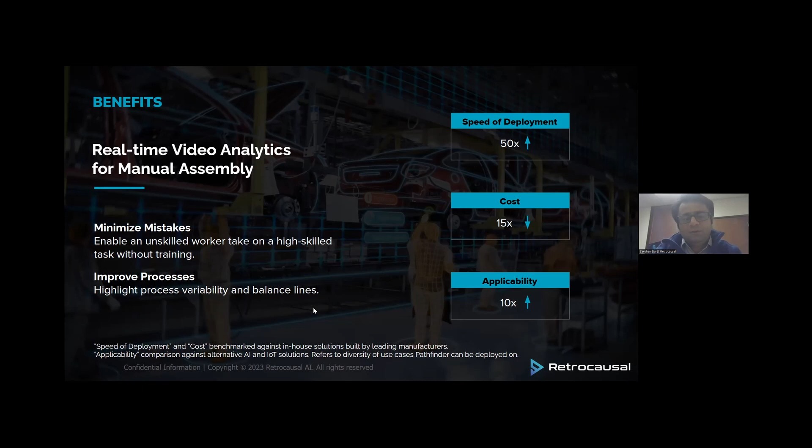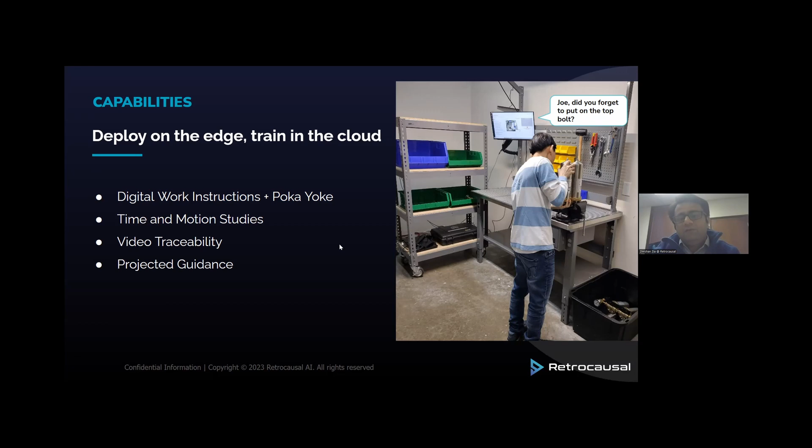These are some of the capabilities that we provide, and I'll walk you through a couple of those real quick. Our solution is centered on digital work instructions and digital poka-yoke, which help your workers get instruction when they need it, as they need it, right there and then. We provide time and motion studies, record video data for video traceability, and have the capability of projected guidance.

One of our core principles is worker privacy. So while yes, we are recording video data of manual assembly processes, we have several capabilities centered around maintaining worker privacy. We don't want to be big brother, and we don't want to be complaining about your workers to you. I'm happy to dive deep into a number of things in that domain as well. But let's just dive into a demo video again.

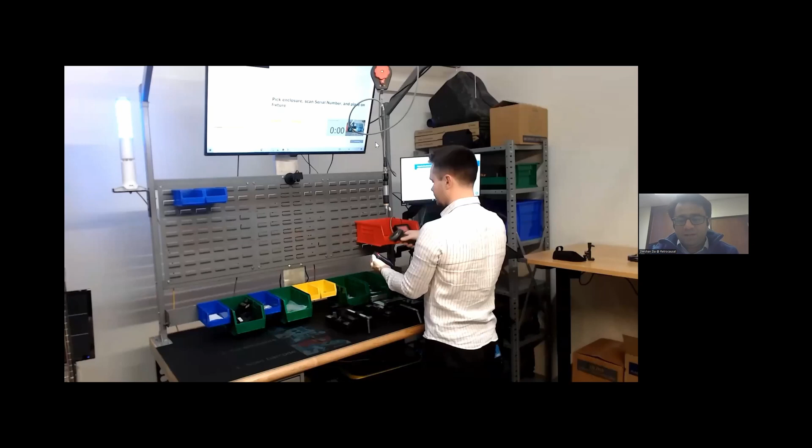Would love to host some of you at our lab and have you try this assembly process yourself. This is a mock-up of a real assembly process where we are deployed. This is for an electronics gadget assembly and packaging. This is the operator's view.

In this case, we put a camera on the operator's head just to capture this marketing video. You don't need a camera on the operator's head, but there's a display mounted in front of the operator, a projector projecting guidance right on the workstation, and a light tower deployed as well. The operator performs a step, and the system offers alerts right there on the workstation as to the next step they're supposed to perform.

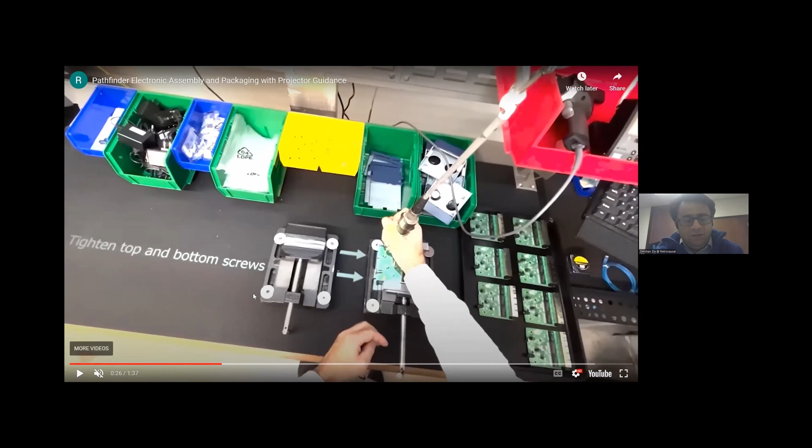This is a display that's mounted in front of the operator. You see here the operator is also getting instructions right on the workstation: tighten top and bottom screws. He's seeing arrows pointing to where he's supposed to tighten these screws. He doesn't have to press a button or anything - the system just automatically detects.

Right now, I'm sure you can't hear it through the call, but on the display, the system shows that an error has been detected, which is that the operator was supposed to tighten the bottom screw, but instead his hand went in and he started picking up the lid to tighten the lid on the enclosure. So the system is offering him an alert here, and there's also this light tower that's going red.

And that's making a noise on this loud factory floor. The operator realizes that he had skipped this step, goes in and fixes it, and the error message automatically goes away. The system detects that the error has been fixed, and the message goes away.

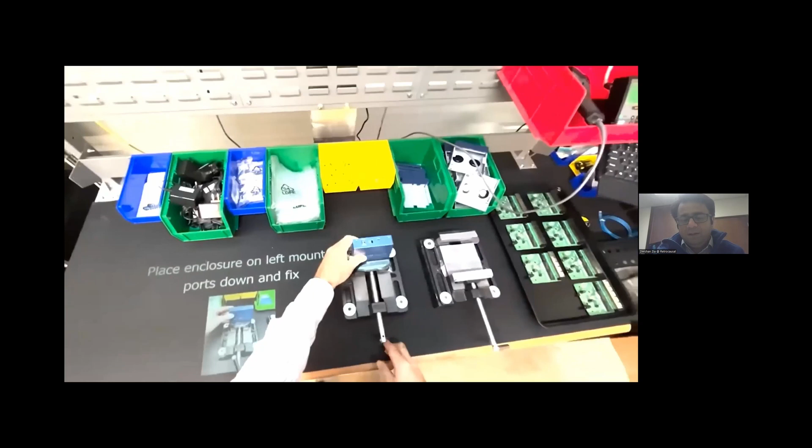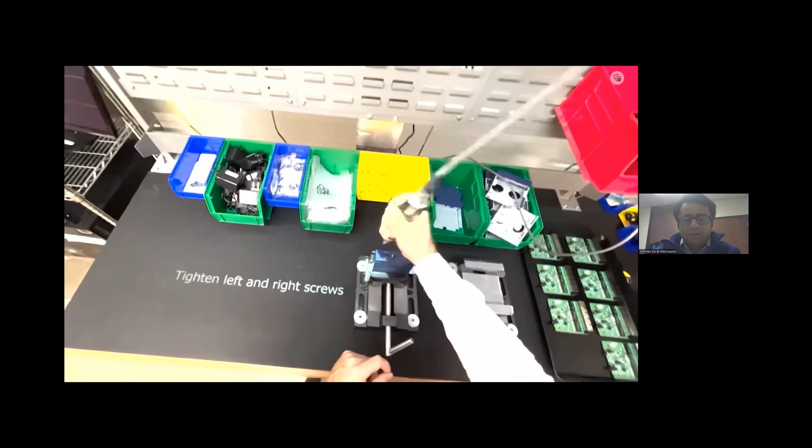Again, the operator keeps performing these steps, and the system is detecting and tracking the step the operator is at, automatically offering the next step and then the next step to the operator. We also have animations and CAD models that you can render directly on the workstation that tell you exactly how to do the process - you don't see it here though.

We've had VP level folks from big companies come into our lab, and we didn't tell them anything. They would just go to this workstation and do this process without talking to anybody, and they would be able to do it completely autonomously and successfully.

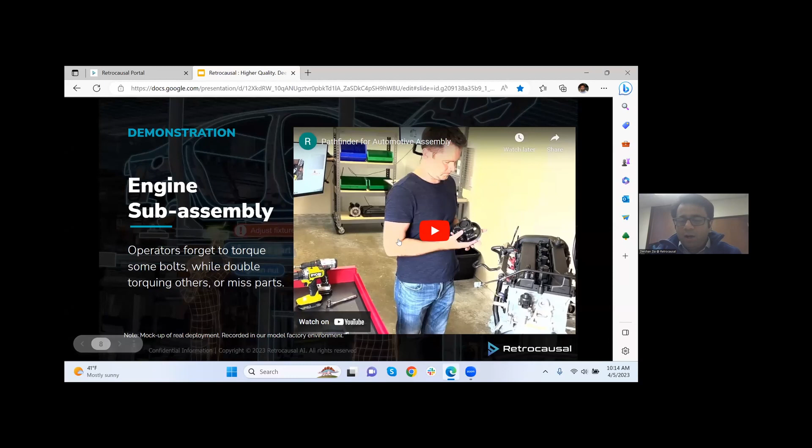So that's one part of it, right? Where there's a display that's mounted in front of the operator. In this case, it's a little bit too big because this was aimed more at exhibitions and so on. But there's a display, a light tower integration, and that projector based guidance that the operator is seeing. This kind of an experience is really simple to build - you can deploy it in a matter of a day or sometimes a couple of days.

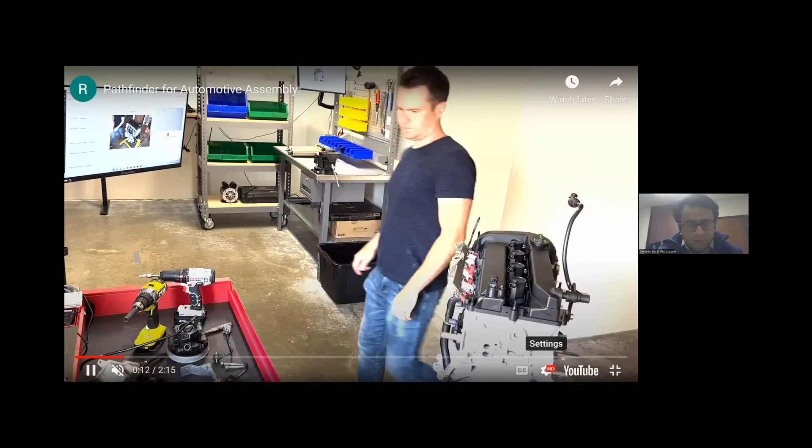Here's another example where we don't have projector guidance - so the projector is really just optional.

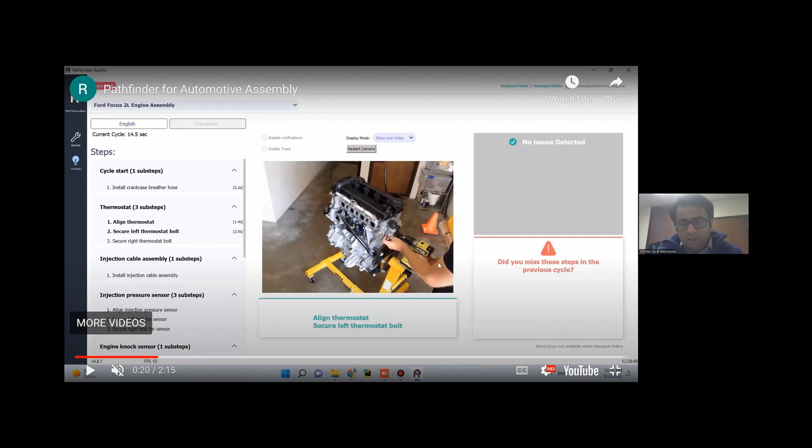There's this display that the operator is seeing, with the system on the left-hand side. You see the standard operating procedure, each of the steps in the process, with the current step shown in bold. We're also measuring the amount of time spent on each step, and when the operator makes a mistake, those mistakes appear here.

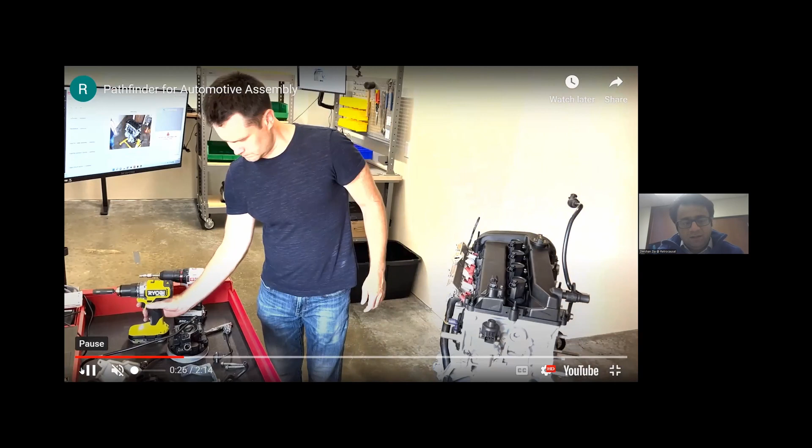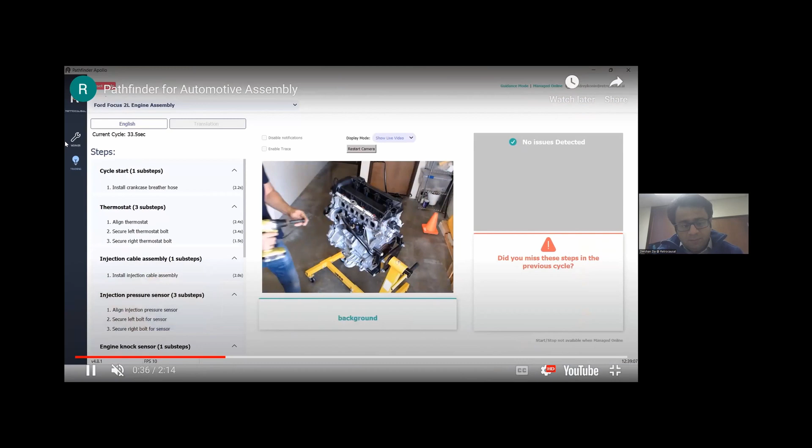We'll see that he makes a mistake or misses a couple of steps, and the system shows him that. He skips a couple of steps and goes forward, and the system shows him he's missing these steps. It offers an audible alert, and then he goes in and fixes those mistakes in real time, and the system signs off on those fixes, saying, yep, you got this, this is great.

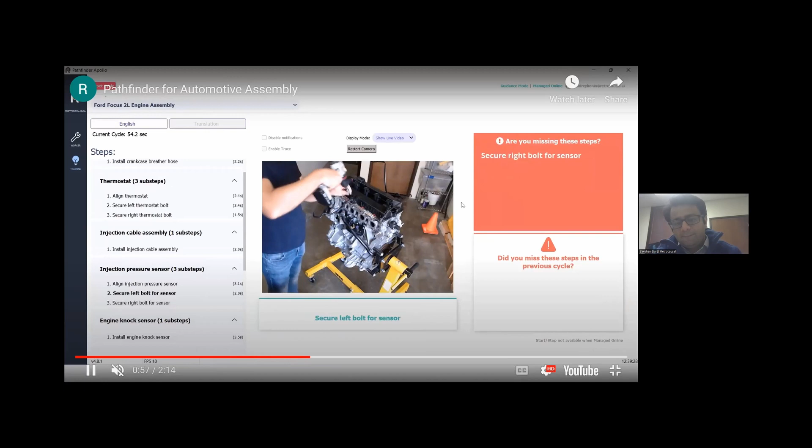Any questions so far, folks? I'd love to show you a bunch of real use cases of this sort of thing.

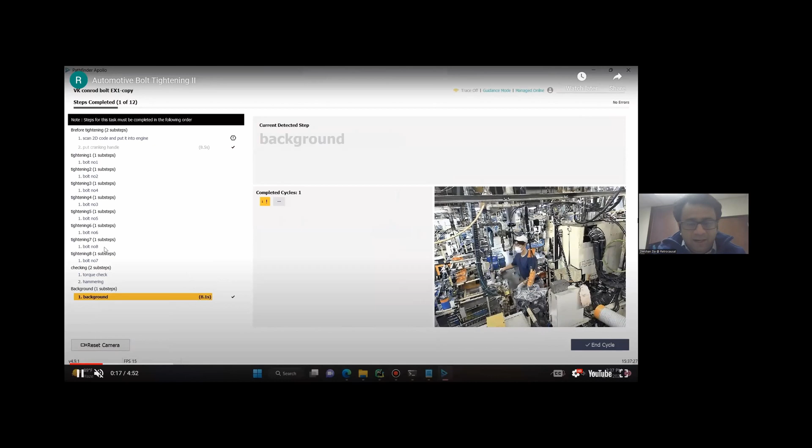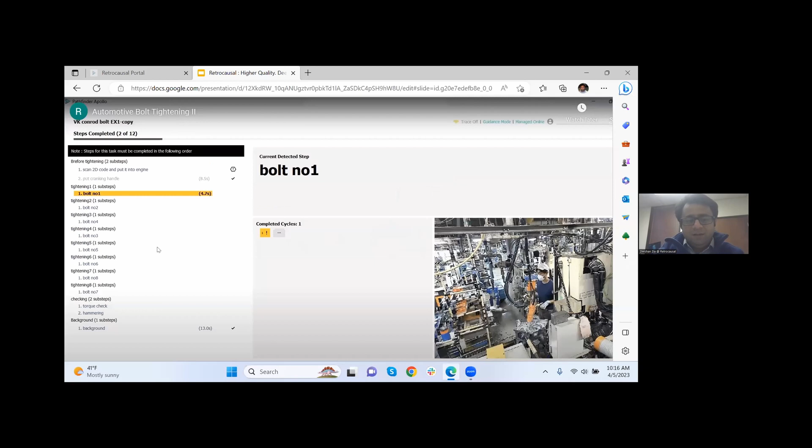In automotive, we're seeing a lot of use cases where operators forget to tighten or double-torque a bolt while forgetting to torque others as they're assembling an engine. This operator is supposed to tighten 8 different bolts with this torque gun, and oftentimes they'll double torque a bolt while forgetting to torque others. This is a real deployment with a large auto manufacturer.

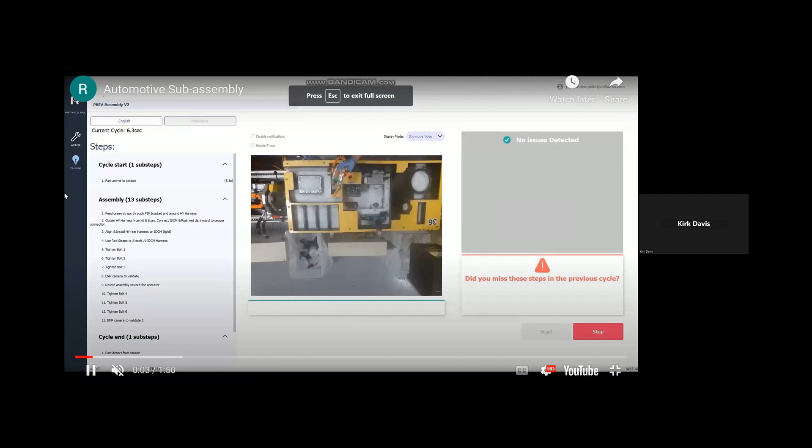Dr. Zia, I have a quick question. This is Kirk. I'm very fascinated with the different work environments you've shown, and I'm sure everybody watching is thinking of their own work environment. The first one was kind of a tabletop system, but now we're watching people do this in more of an open environment. Is there a limitation to the type of environment this technology can work in?

No, obviously you want to be able to see the activities you want to capture with a camera. There are environments where we haven't been that successful, for instance when the operator is doing assembly inside of the vehicle body—it's just hard to find a placement for the camera that will work. But as long as the camera can see it, if a human looking through the camera could understand what's going on, chances are our system can as well.

This is an example of a really small electronic device, a medical device being assembled. In this case, the camera is placed really close to it, even though the parts are really tiny. Because the camera is close enough, it's still able to capture it.

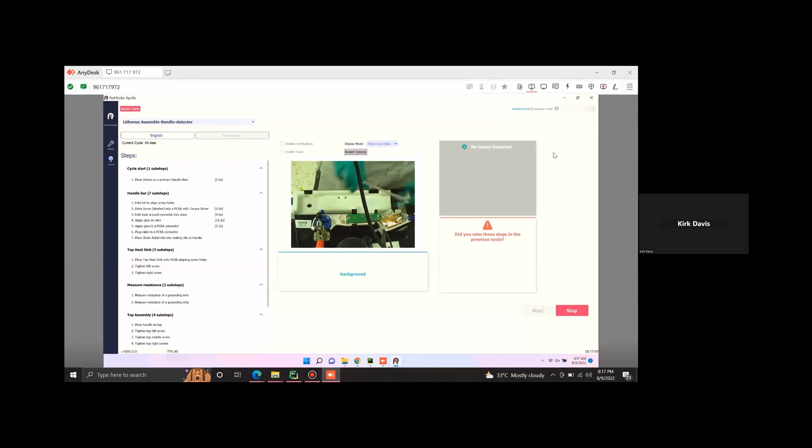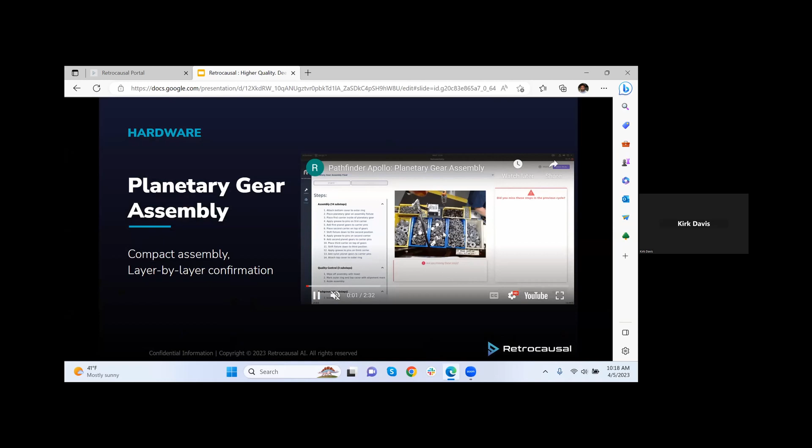Kirk, does that answer your question? Yes, and I'm amazed by this technology and the artificial intelligence behind it. But when this is getting set up, is it just watching the workers do the correct sequence correctly? Is that how it's learning?

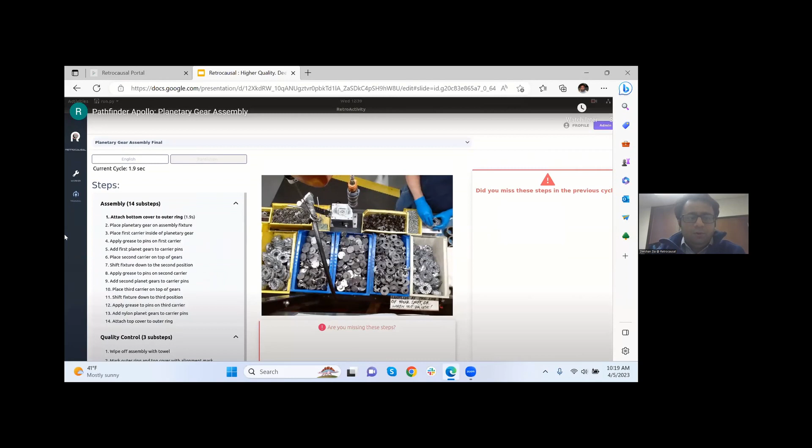To set the system up, all you need to do is go in and define the task—that is, name the steps in the process, enter a bunch of names. If you have ERP or MES integration, the system can pull in your process definitions automatically as well. But the first step is you just need to go in and define the process itself.

Maybe it's assemble a printer, something like this. You go in, and a single camera can capture multiple processes, so I'll just say this is the default process—mechanical assembly. We can put multiple sub-steps under a step, and those sub-steps can be performed out of order.

So we do give the operator this flexibility that they can perform certain steps out of order, while certain other steps need to be performed strictly in order. So the operator has that sort of flexibility. But basically, it's very simple to define a process, takes you about 5-10 minutes at most.

The second step is you go in and set up the system to record training data. We typically require a few cycles of the process being performed. So you go to your workstation, set up a webcam, set up a Windows machine, and you're able to control it from this web-based control panel. You can schedule recording, so you can say do the training set, record training data for training these machine learning models, my shift starts at 10 a.m. and you just need to record till 12 p.m. You schedule it, and the system will automatically record that training data.

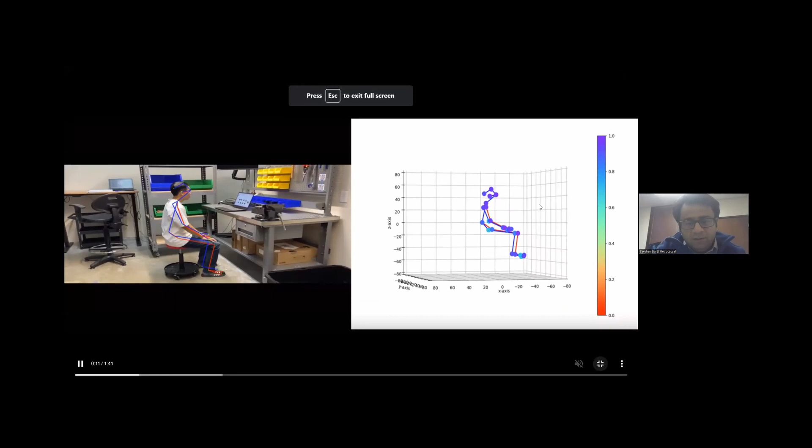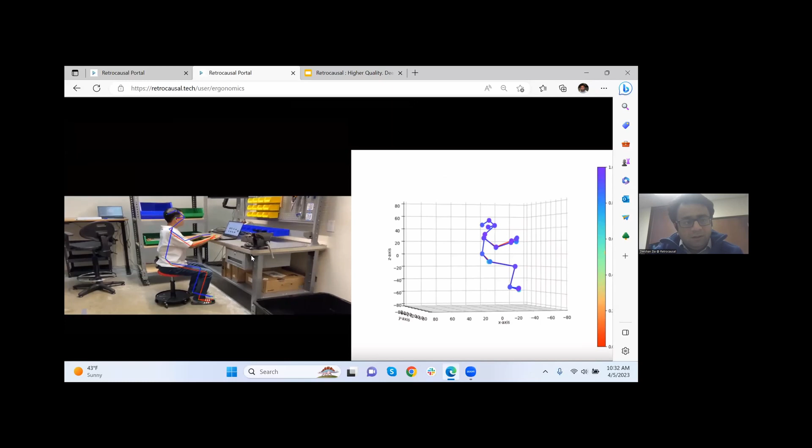We are trying to build a holistic process management platform centered on manual work. So you'll see this is one of our colleagues in our lab doing an assembly. He's doing something there, and the system is able to extract his skeletal poses, and based on those estimations, it's able to perform NIOSH recommended REBA and RULA analysis.

NIOSH is the research arm of OSHA, and here it has identified the high risk intervals in this long video. So if I click on one of these intervals, you see this is a dangerous action. It notices this is another dangerous action. If you're doing this repeatedly, it might lead to injuries. This is another dangerous activity.

It's offering certain guidelines. Hey, look, the neck angle in this video is really bad, you should do something about this. It's actually capturing the actual angle of each individual joint - left arm, right arm. So if you want to fill out an ergonomics assessment spreadsheet, you can do that with readings from here.

We're also adding a button here where you'll directly be able to download a NIOSH standard report. So we have REBA and RULA - these are different kinds of standards that NIOSH recommends for ergonomic analysis. All of this is baked into the platform.

And then we have a ChatGPT-like interface as well. Let me take one more minute and walk you through that. We're just about to release it, so it's still on the test portal. You'll see.

We're calling it the Kaizen Advisor. The idea is that now you can plug in our platform - it's trained on hundreds of thousands of industrial engineering and manufacturing engineering textbooks, research papers, and blog posts. And you can train it on your own organizational knowledge bases. If you have ERP systems, QMS quality management systems, continuous improvement systems, we can train a generative AI on those as well. And of course it's connected to our sensor infrastructure, camera and IoT infrastructure.

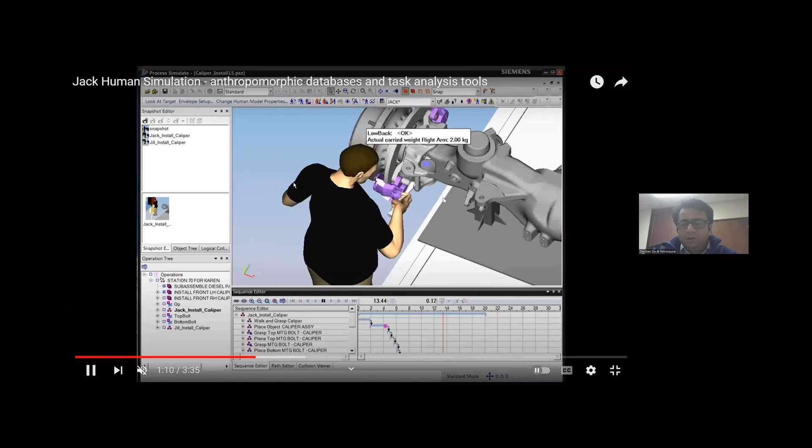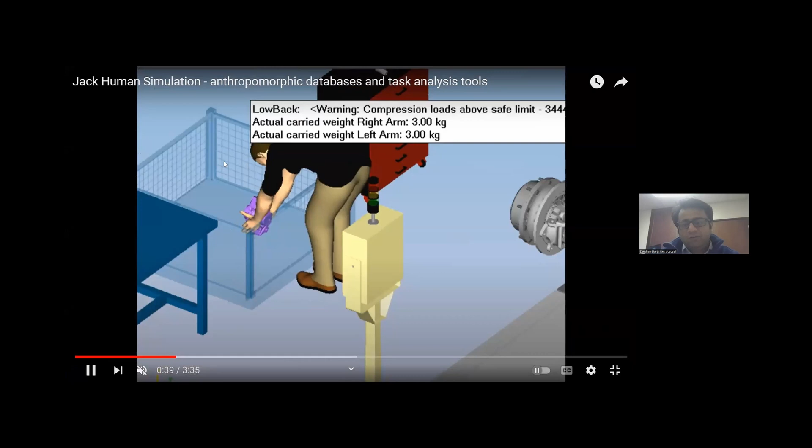This is not us today - this is Siemens, right? But Siemens has this tool called Siemens Process Simulate. And in here you can actually define a whole process, click on the person, change the person's type, body shape and so on and so forth, weight, height, and make the person do certain kinds of processes. And you can extract timing metrics out of it, extract ergonomics out of it. Essentially you can design an entire factory.

You can also simulate robots and so on, but you get the message, right? Yeah, and we are connecting our engine to that as well.

And again, absolutely, Dr. Zia, I'd like to just get a feeling from you about the future of manufacturing based on your technology. It sounds like you're partnering with some of the very big players who are thinking ahead in manufacturing as well. But with this access to this kind of knowledge and the guidance and assistance to associates, and the information that comes up to engineers and management, where do you see this going for manufacturers?

So the way we look at it is, like I started at the beginning, industrial engineering is still essentially done the way it was done 120 years ago. Yes, you have Lean Six Sigma and all those nice tools, but everything is still very much engineer centric. You have an engineer, they come onto your factory floor, they work there for a couple of years, and everything is in their mind. They'll write it down into some Excel sheet, but your knowledge-based systems are getting so much knowledge into them that it's impossible for somebody else to track them. That engineer goes away, and now you don't really know why that process was designed the way it was designed.